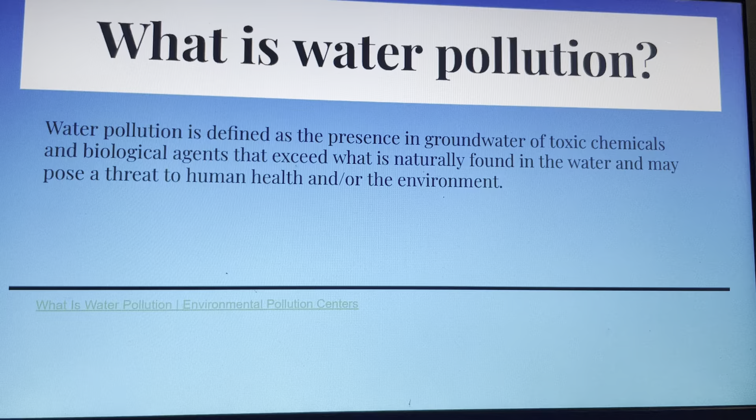So, what is water pollution? Water pollution is defined as the presence in groundwater of toxic chemicals and biological agents that exceed what is naturally found in the water and may pose a threat to human health and/or the environment.

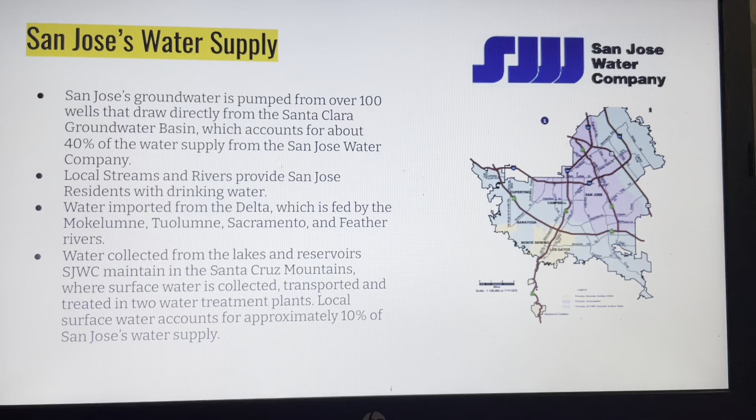We should know that with water pollution comes a lot of waterborne diseases.

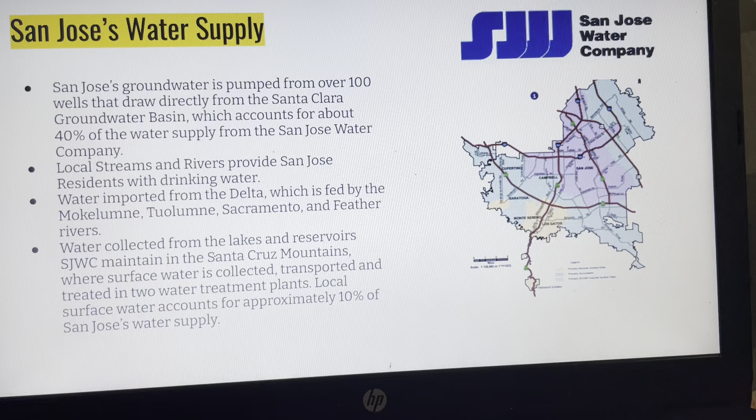Let's start with San Jose's water supply. We get our supply from the San Jose Water Company. I got a picture of the map they usually service, underneath the San Jose Water Company logo, which I also got from their website.

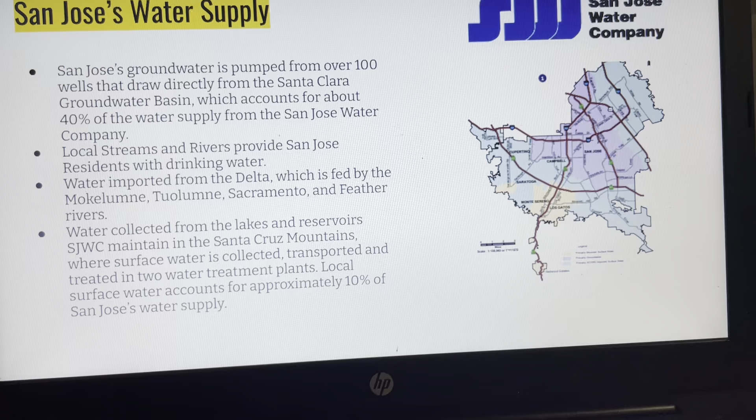San Jose's groundwater is pumped from over 100 wells that draw directly from the Santa Clara groundwater basin, which accounts for about 40% of the water supply from San Jose Water Company.

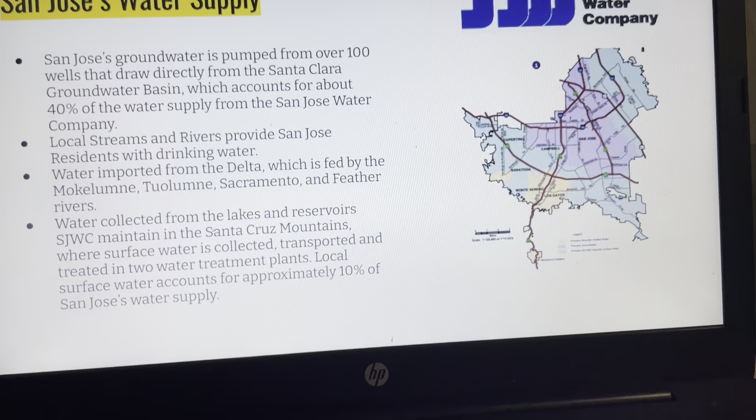We get our drinking water from local streams and rivers, and our water is imported from Sacramento and its surrounding rivers, and water collected from lakes and reservoirs.

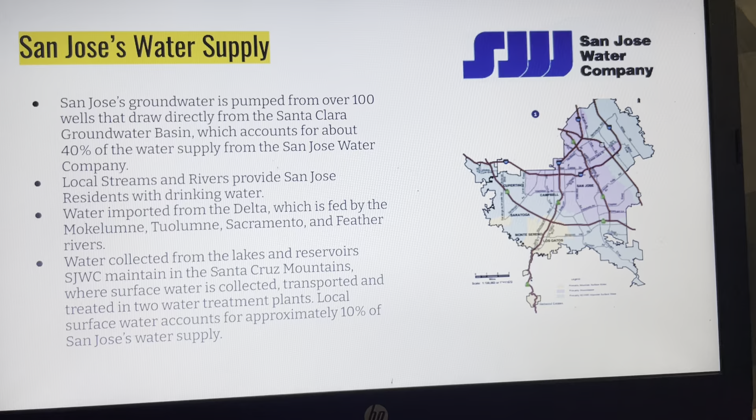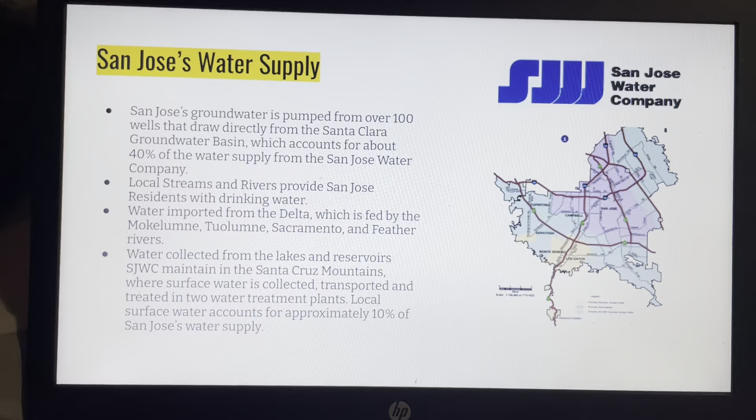San Jose Water Company maintains land in the Santa Cruz Mountains, where surface water is collected, transported, and treated in 2 water treatment plants. Local surface water accounts for approximately 10% of San Jose's water supply.

So, how do we stop water pollution? There's point source pollution that comes from municipal sewage and industrial discharges, and there's non-point source pollution. Point source pollution is direct.

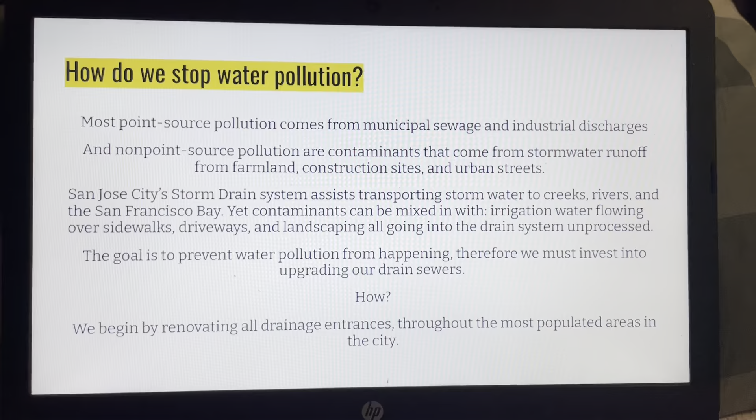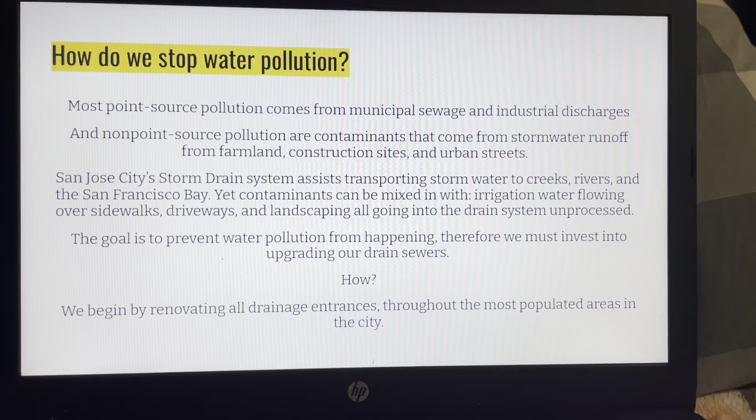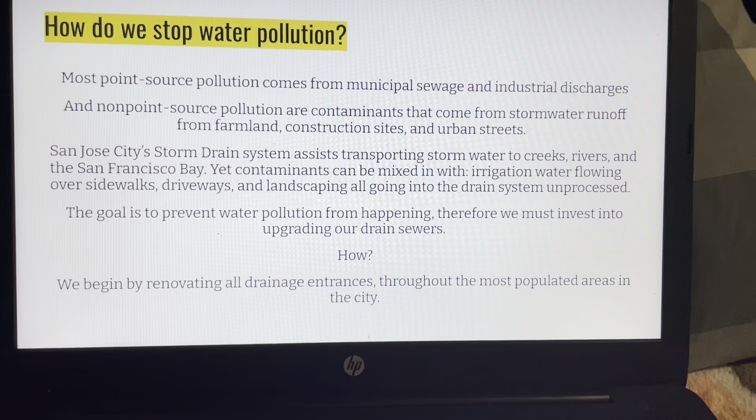For example, in 1981, Cincinnati suffered from a paint factory that discharged hydrochloric acid into the city sewers. This resulted in the sewer pipes collapsing, and they were pretty much out of business for a few years.

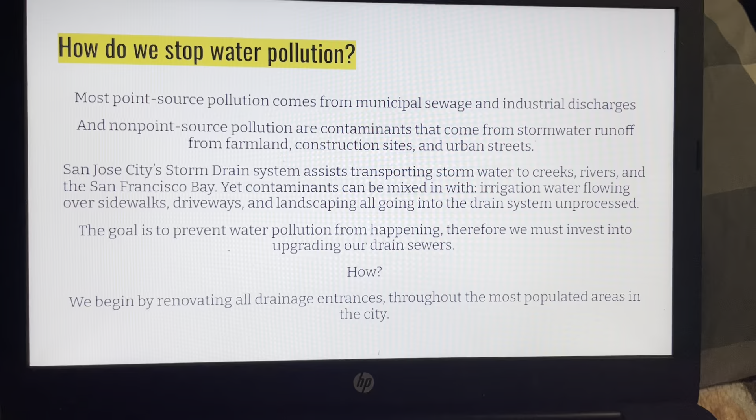Sewage systems are the nation's most frequent violators of the Clean Water Act. The Clean Water Act is a law meant to have lakes and rivers be fishable and swimmable.

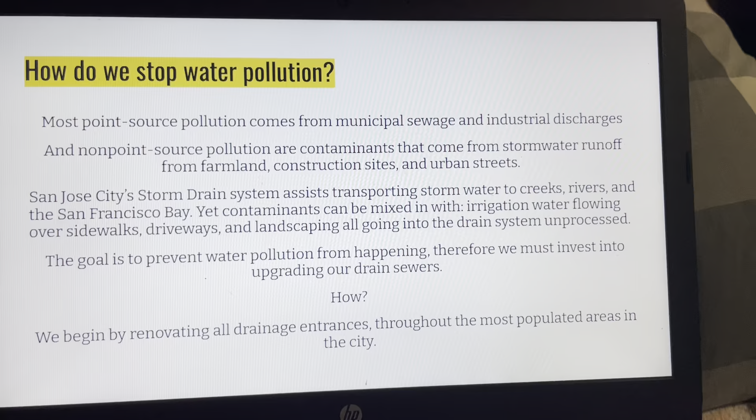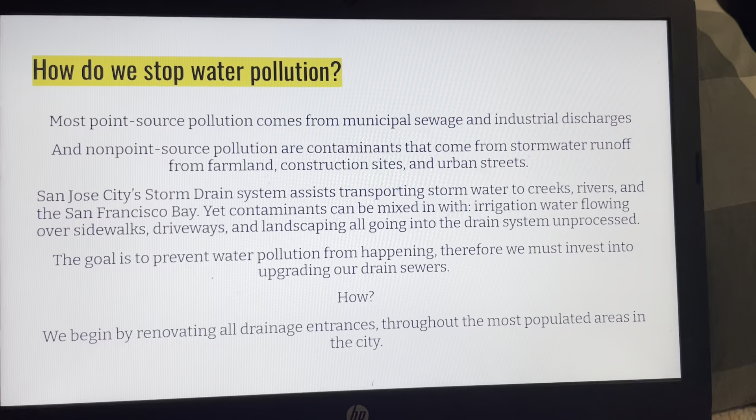Non-point source pollution are contaminants that come from stormwater runoff from farmland, construction sites, and urban streets. This is actually the biggest threat of water pollution because there is no control of it.

For example, because of this, a waterborne disease sickened 400,000 people in Milwaukee, Wisconsin, and they believe the reason this happened was agricultural runoff.

So it's very important, as well, the New York Times actually said that sewage systems are the nation's most frequent violators of the Clean Water Act.

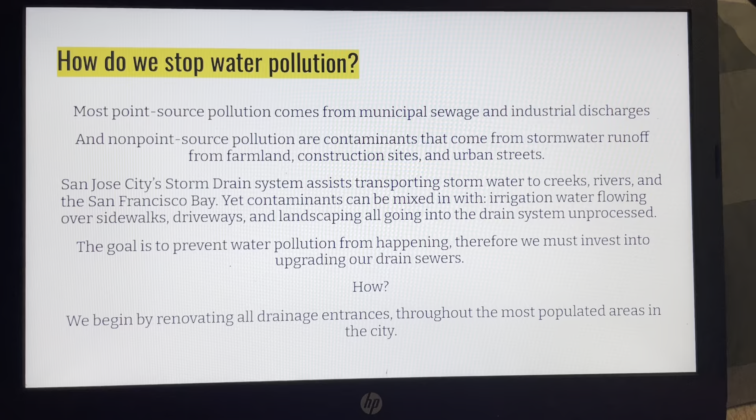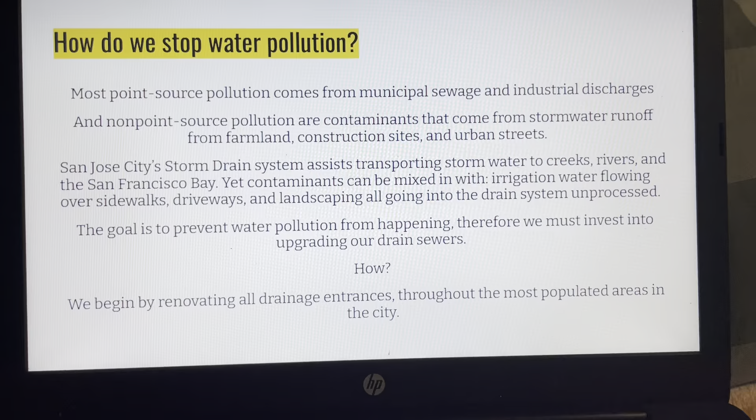San Jose City storm drain systems assist in transporting water to creeks, rivers, and San Francisco Bay. Yet contaminants can be mixed in with irrigation water flowing over sidewalks, driveways, and landscaping, all going into the drain system unprocessed. The goal is to prevent water pollution from happening.

Therefore, we must invest in upgrading our drain sewers.

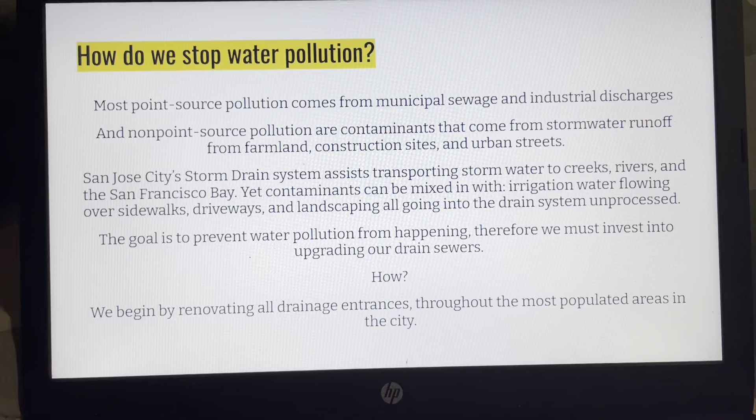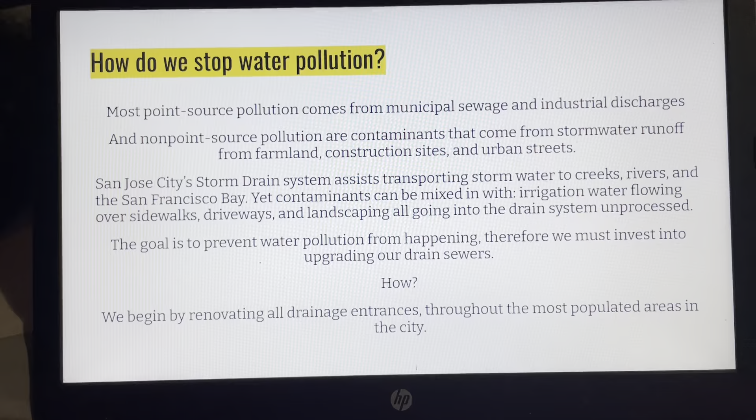I believe it was the Engineer Association, I forgot who exactly, that said in order to fix the nation's sewage infrastructure, it would take 20 years, and not only that, but it would also cost $298 billion to fix.

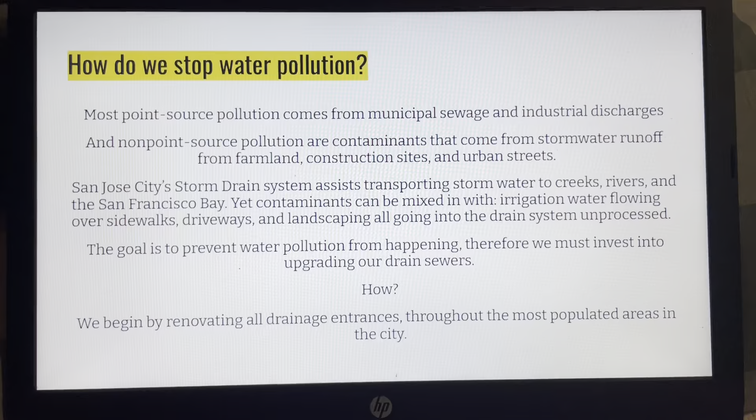So I guess we begin by renovating all drainage entrances throughout the most populated areas in the city. But because this is such a high cost to do, especially in San Jose, there are 35,000 storm drains in San Jose.

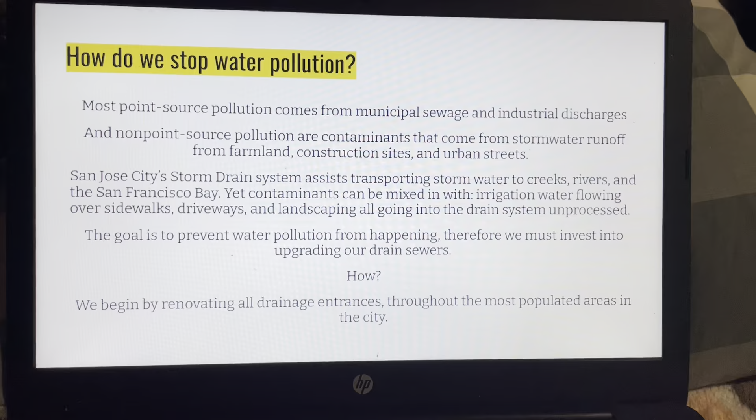So I would want to start by renovating 1,000, just because it's like a trial in the beginning. If it works, then they proceed to do the remaining 35,000.

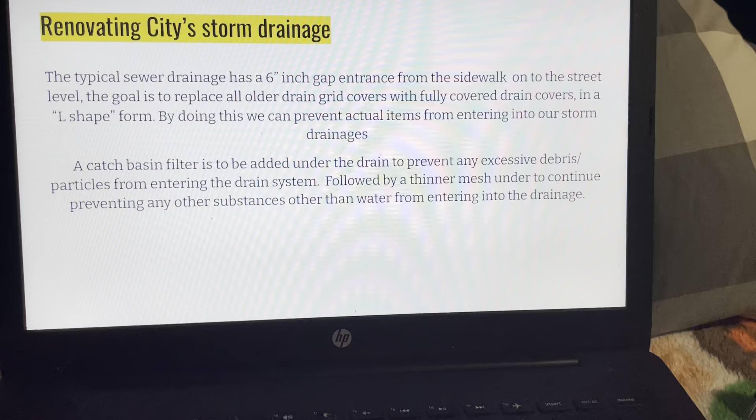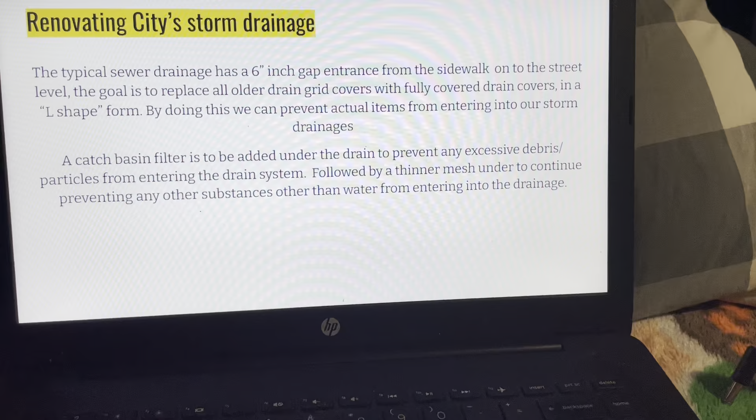So, renovating city storm drainage: the typical sewer drainage has a 6-inch gap entrance from the sidewalk onto the street level. The goal is to replace the older drain grid covers with fully covered drain covers in an L-shaped form.

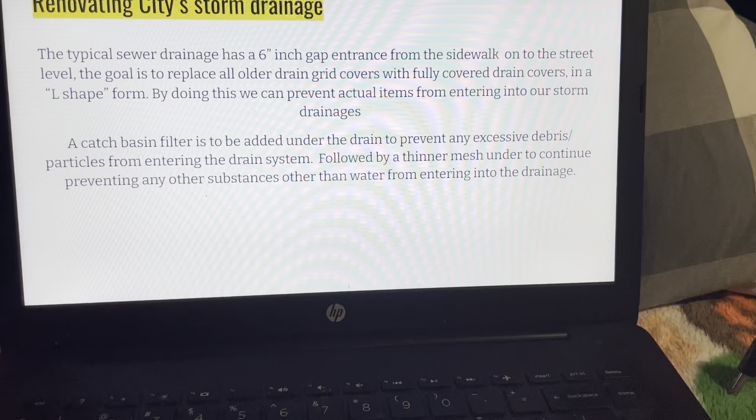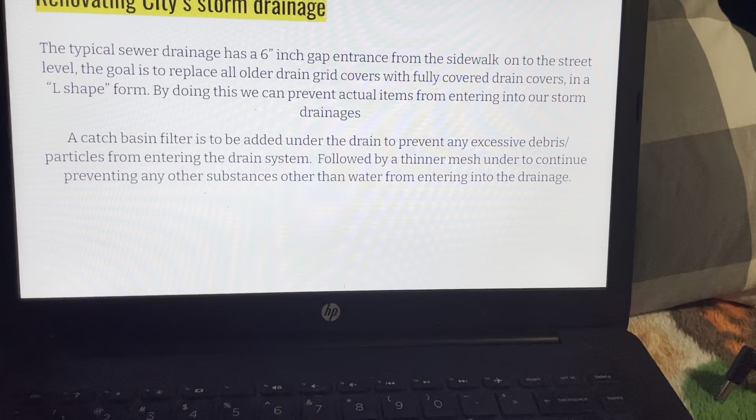By doing this, we can prevent actual items from entering into our storm drainages. A catch basin filter is to be added under the drain to prevent any excessive debris particles from entering the drain system, followed by a thinner mesh underneath to continue preventing any other substances other than water from entering the drainage. So it's like a do-it-yourself type of filtering instead of having a filter machine under the drain that would cost thousands.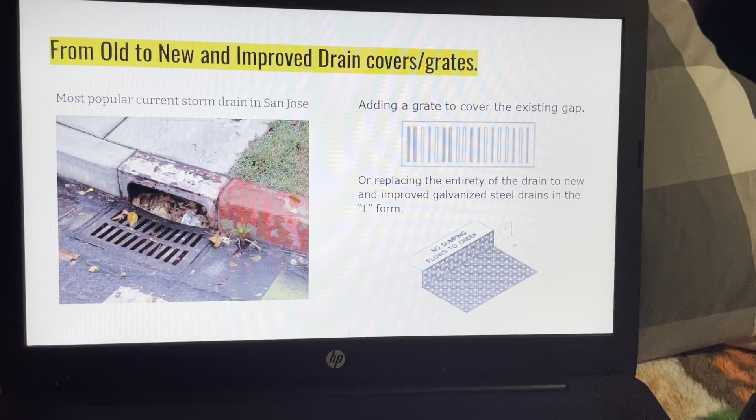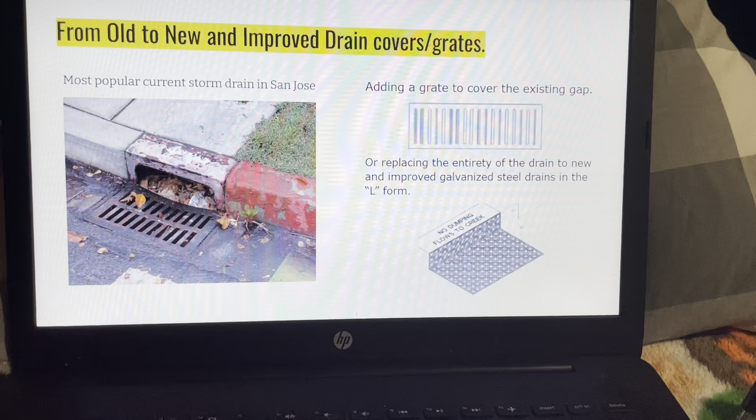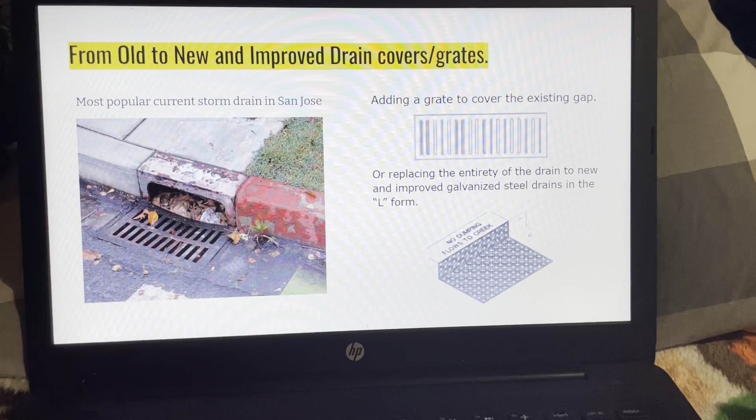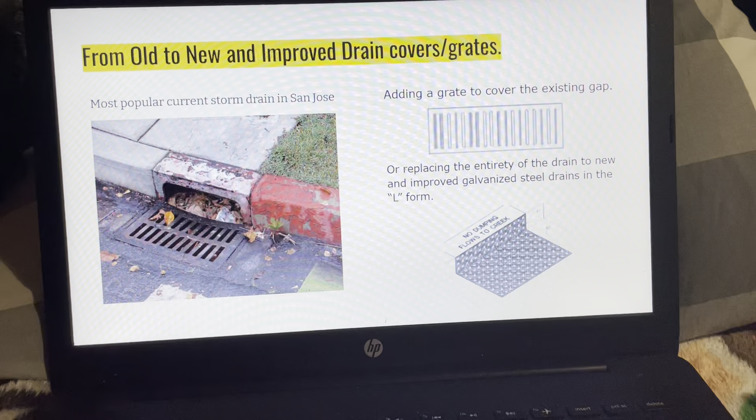We would start with something like this: from old to new improved drain covers and grates. On the left is the most popular current storm drain in San Jose, with a 6-inch gap opening there, which this picture shows perfectly because it has a lot of trash in the storm drain, which just clogs and causes pollution all over it.

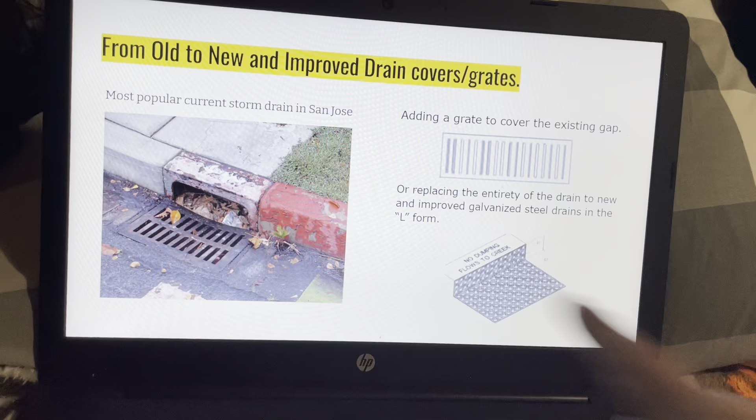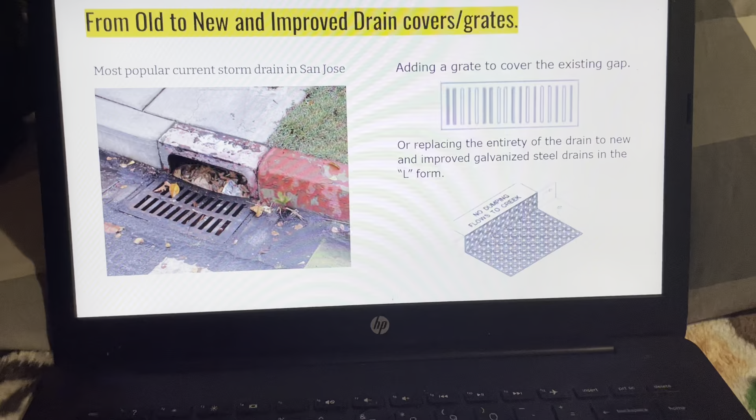Or replacing the entirety of the drain with new and improved galvanized steel drains in the L form. This is what I mean by the L form here. So it would be a drain like this, but over this, and nothing would be able to get in but water. Thick substances might get in, but again, the catch basin filter underneath would sustain it.

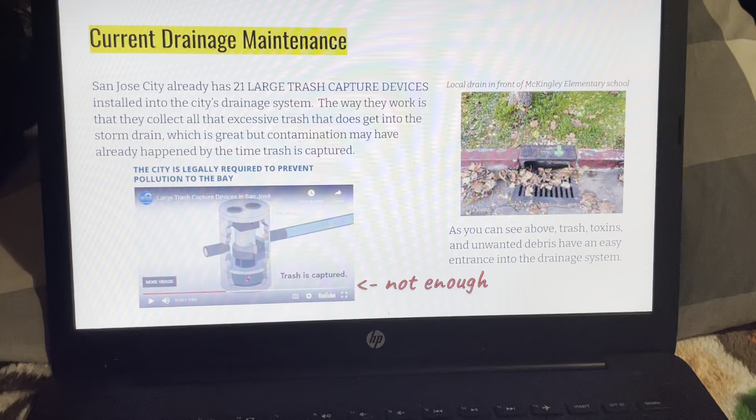So our current drainage maintenance - pretty much San Jose City has already established 21 large trash capture devices into the drainage system. The way they work is they collect all excessive trash that gets into a storm drain, which is great, but by the time we capture that trash, contamination may have already happened.

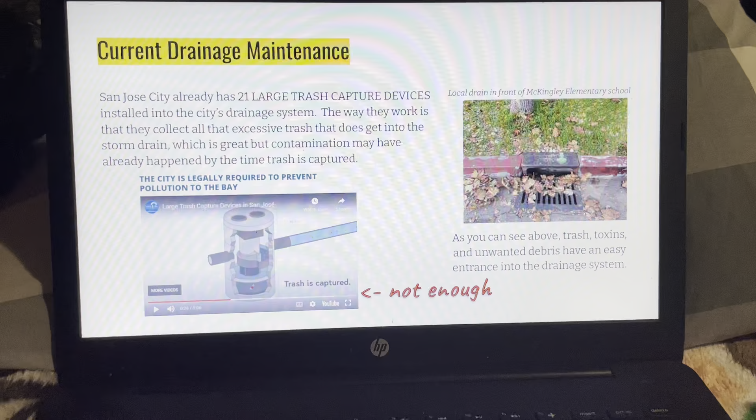This is a picture of a drain in front of McKingley Elementary School. Again, that 6-inch gap is the entryway for trash, toxins, and unwanted debris to have an easy entrance into the drainage system. We need to eliminate that.

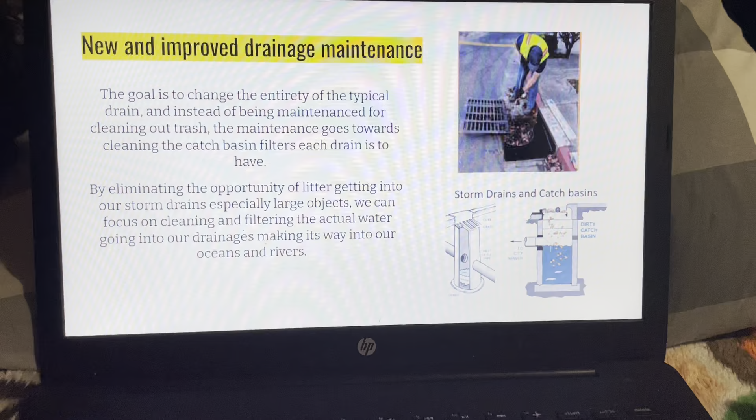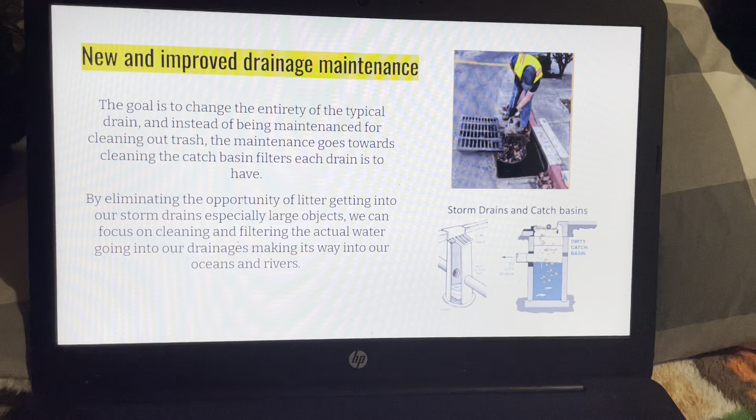So the goal is to change the entirety of the typical drain, and instead of maintenance being for cleaning out trash, the maintenance goes towards cleaning the catch basin filters each drain is to have. By eliminating the opportunity of litter getting into our storm drains, especially large objects, we can focus on cleaning and filtering the actual water going into our drainages, making its way into our oceans and rivers.

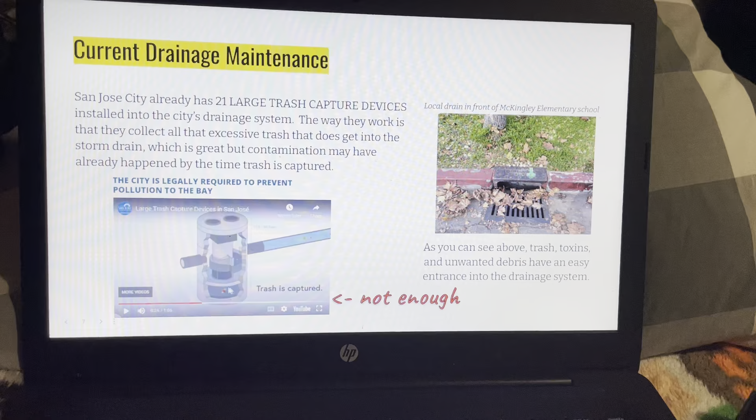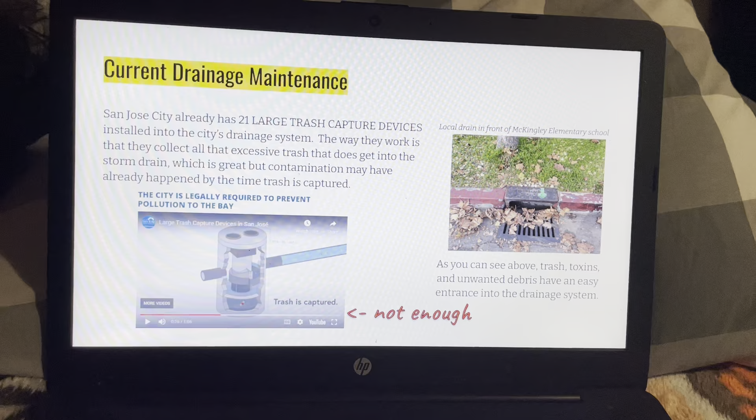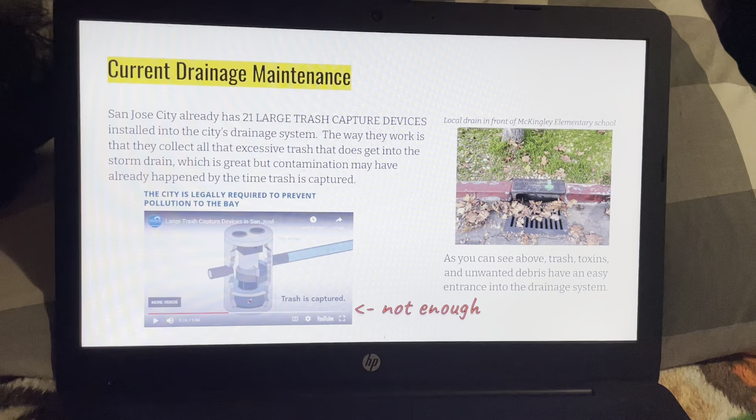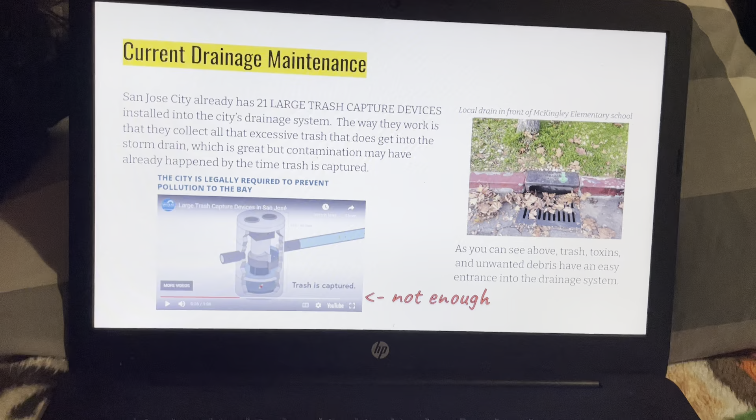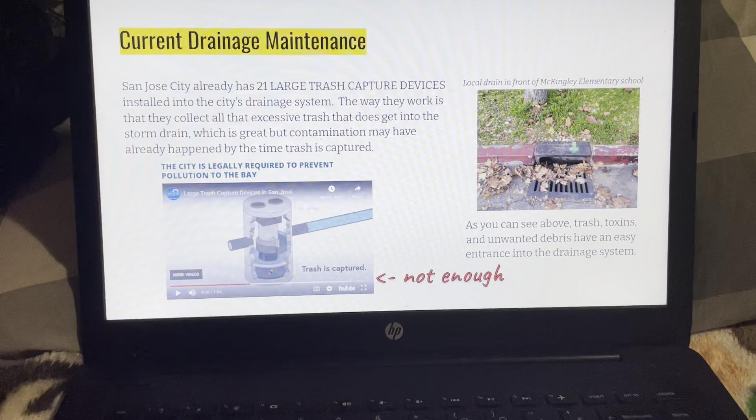So the point of eliminating any entryway is that trash itself is polluting, but when there's oil or contaminations, chemicals that people can have no regard for and just throw into the drain instead of disposing of them the proper way, that's when it's a big problem, and that's where the biggest threat comes in. Like I said, sewage systems are the nation's most frequent violators of the Clean Water Act. So we need to close off any entryway and make it purely for the purpose of water.

So the cost of this - to minimize costs, integrating the gap cover can be more cost effective. Each grate cover can range around $100 according to a few online websites. Yet upon a bulk order, the cost can lower. For the drain grate itself, we would be replacing cast iron with a galvanized drain, and the cost around that is about $185. But together, you're looking at maybe $300.

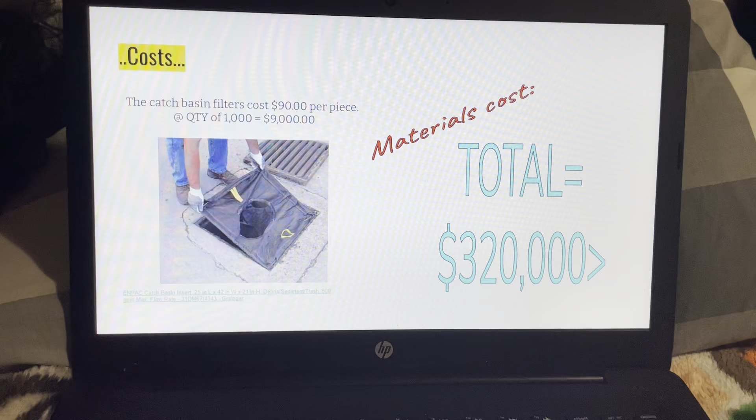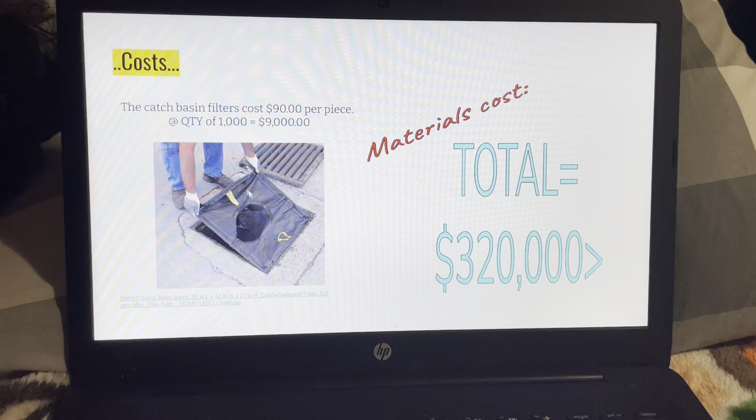And that's just on the drain grate covers themselves, not even including the basin filter. The catch basin filter is another $90 per piece, and at a quantity of 1,000, that's $9,000. But even then, these are heavy duty and durable - that's why they're $90, but they're not lifetime, so the cost of this would always increase since you probably have to buy multiple throughout the years.

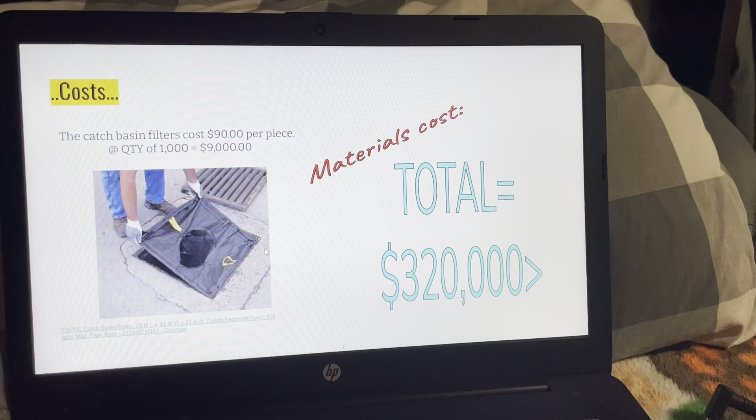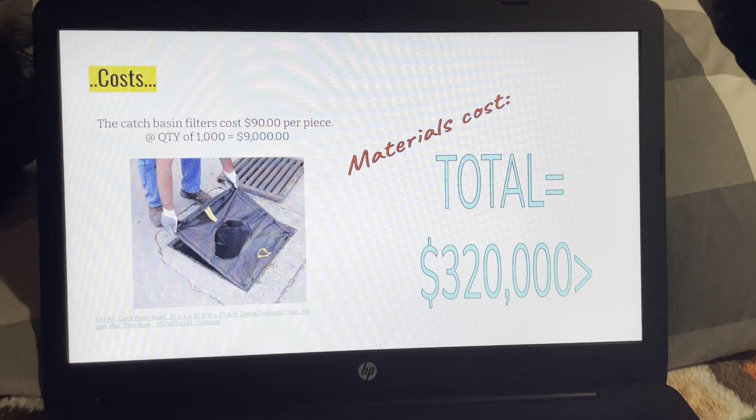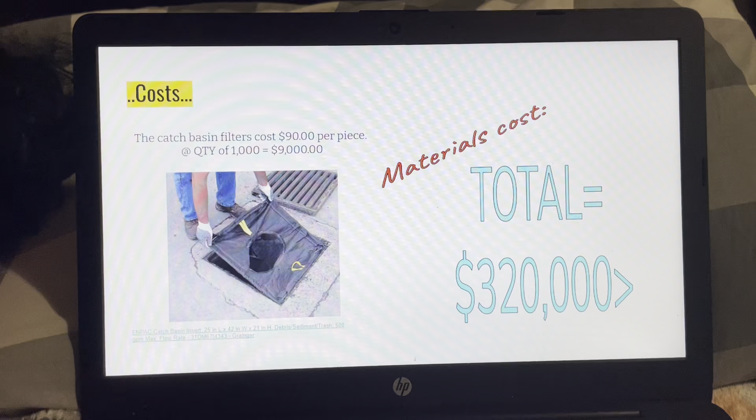But the materials for initiating the project would be just the materials cost - we're looking at $320,000. Labor itself would probably be you multiply maybe twice as much, so it would be maybe $1 million startup, just because labor would be the most costly thing with prevailing wage and all that, because it is a city type of job.

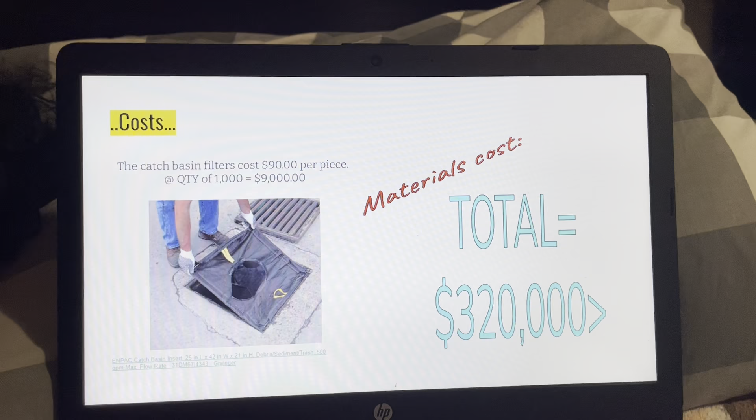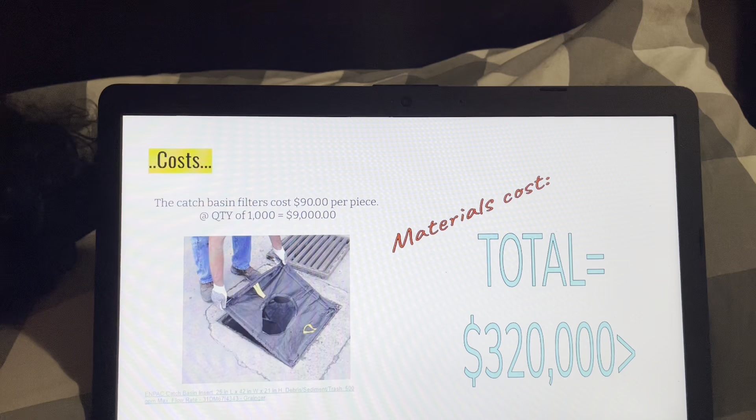But that's the idea of eliminating any entryway into the drainage system. That way, the only thing going in is water, and being able to filter and clean that might be easier than having to clean out trash and all that stuff.

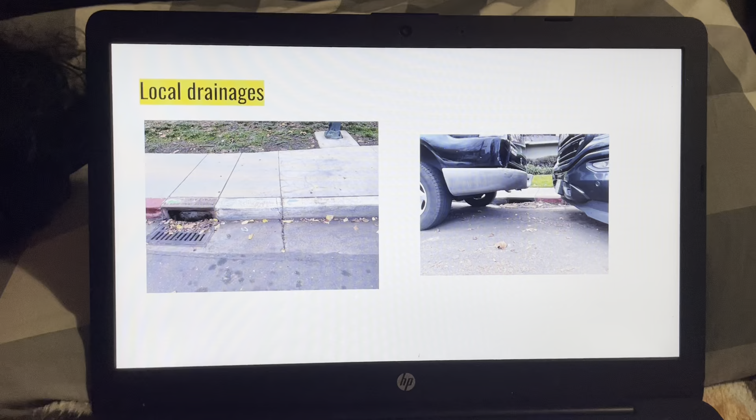These are local drainages. They're, again, the most common popular drain. It's that. And they're all filled with leaves and trash, unwanted debris. We need to eliminate that.